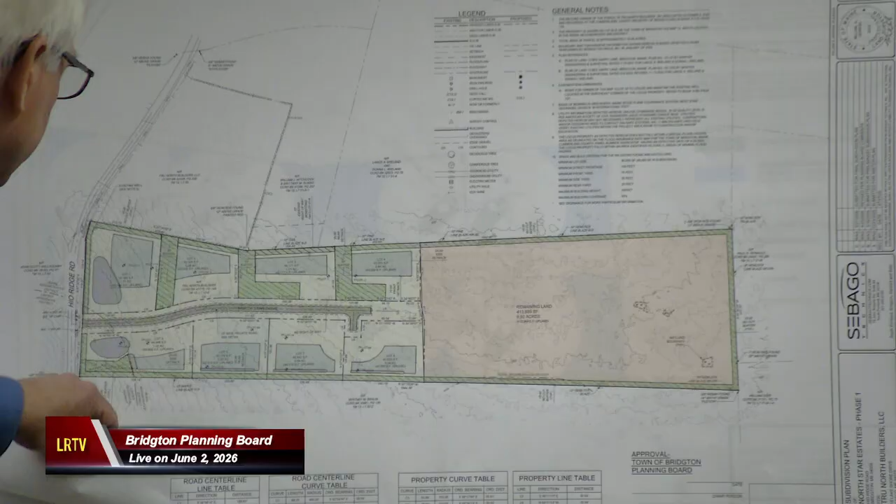And as you may recall, we had some discussion about septic locations, well locations, and meeting all the setbacks. Some of the proposed wastewater disposal systems were moved around,

particularly in this lot. We also did another test pit in this lot to make more room for the building envelope. Initially, some of the test pits before the subdivision was designed were done too close to the boundary, and

one was in the pond. So those test pits have all been redone or added. That additional information was in the package.

The hydrogeologic study has been updated to reflect all of that information. It's kind of hard to see on this, but there's some dots here that represent the proposed well locations.

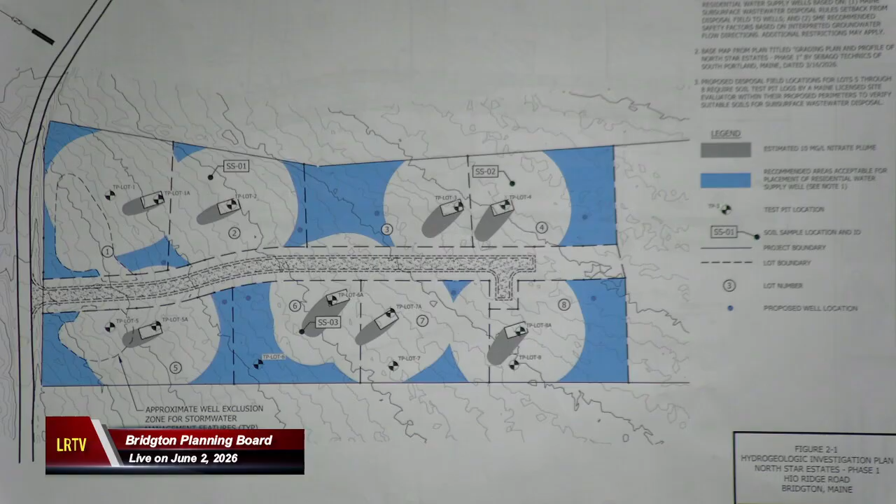And we feel that we've addressed all the groundwater and wastewater disposal comments and questions by providing this additional information.

We also had some discussions about soils mapping, and we have requested a waiver from the requirement to do a high-intensity soil survey, given all the test pits, the grain size analyses, the hydrogeologic study, and the fact that there's

no very poor draining soils on the site. There's no large bedrock outcroppings or other limitations, and we just didn't feel that a high-intensity soil survey would provide us any beneficial information that we don't already have.

There was a question with regards to the county soils maps. We had used a

NRCS, U.S. Department of Agriculture, Natural Resource Conservation Service, NRCS soils map as part of our stormwater study.

The engineer that conducted this analysis used a map that was prepared by the same agency. They're both near the county line, so there's some overlap.

Our map identified the soils based on the Oxford County nomenclature, whereas the other study based it on the Cumberland County nomenclature.

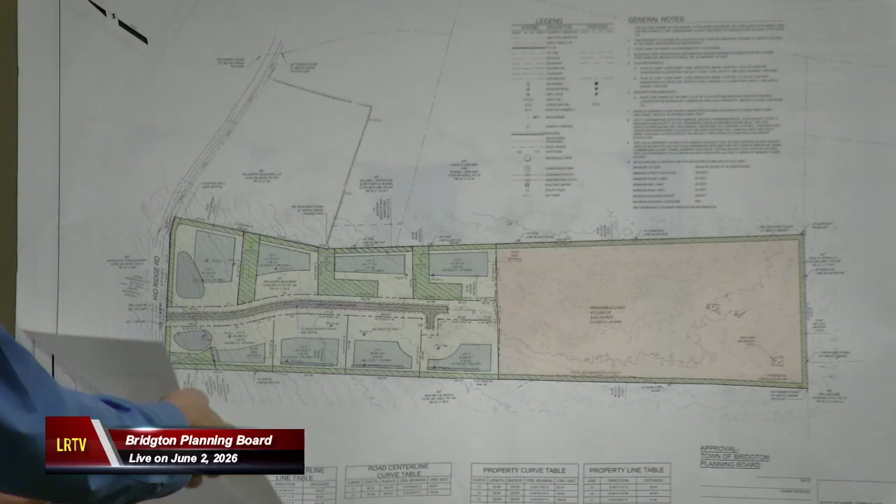It was pointed out that this was originally a 38-acre lot that was split in half into two 19-acre lots. The lot was all logged at one time. There are a number of old logging roads, tote roads that go back and forth over the boundary line. We went down that line all the way along the property with a survey crew and located those openings. They are shown in here, all the gaps that we found. Otherwise, we found pretty good vegetation.

We did provide some pictures in the package of those areas, the typical buffer areas as well as the openings. Given the age of the regrowth on that parcel, there's a lot of good material—small pine trees and small hemlock trees throughout the site that will be within the cleared limits for the proposed houses. So the applicant proposes to remove some of those trees and transplant them along that boundary line as shown on this plan.

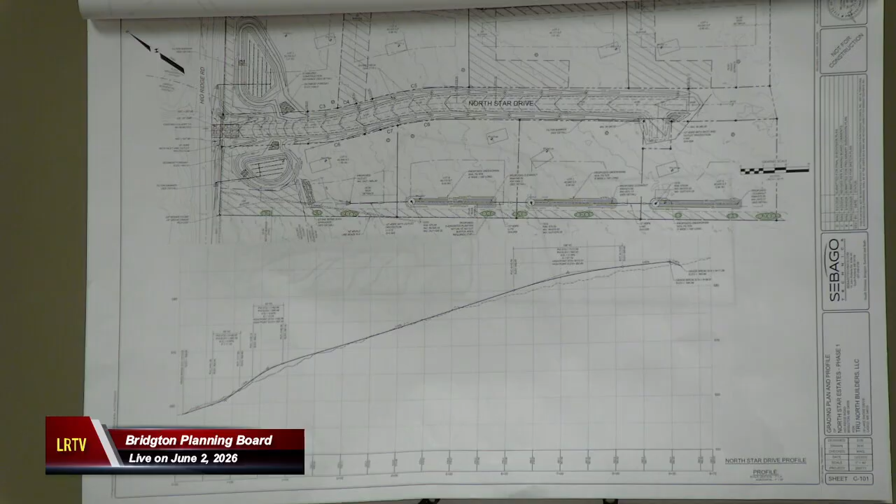And that should provide some good screening in those open areas. The only other significant thing we discussed, or didn't have for this submission but have now, is the homeowner association documents. The ordinance does require some sort of document that outlines the maintenance responsibilities of the subdivision's infrastructure. We received those documents yesterday in draft format. We did submit those to the staff, and they do clearly outline the maintenance responsibilities for the homeowner association. The applicants will assume those responsibilities until the lots are sold, and then the HOA will take over.

The only outstanding issue we have to resolve with the title attorney is that in the documents it references easements to go ahead and maintain the stormwater infrastructure. So what we will be doing is, just like shown on this plan, showing the stormwater features on the recorded subdivision plan. So when the HOA documents and all the deeds are recorded and this plan's recorded, there'll be that connection between all of those documents, and it'll be all part of the public record.

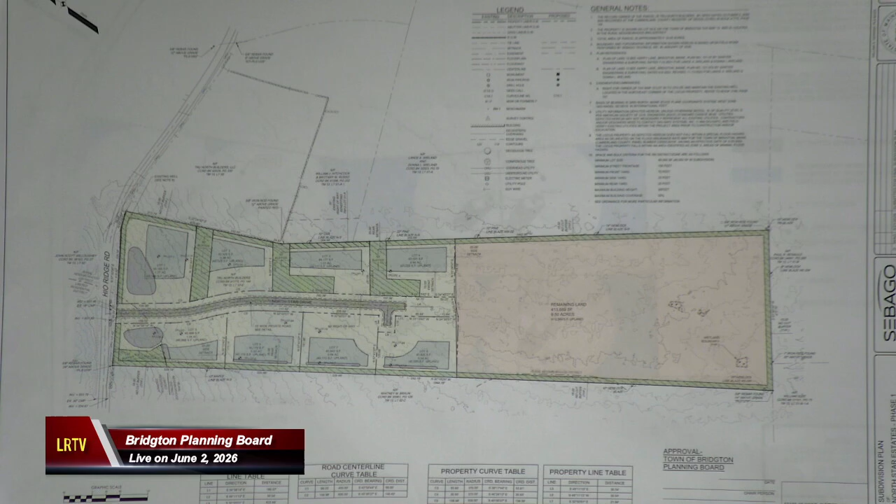Okay, so with those conditions and waivers mentioned, I would accept a motion to tentatively approve the application pending the findings of fact and conclusions of law. Moved by Erica, Ms. Rowland, seconded by Ms. DiPietro. All in favor, please raise your hand. 4-0, thank you.

Again, well done. It's nice when somebody makes our job easier. Okay.

All righty, next on the agenda is the findings of fact and conclusions of law for the Bridgton Highlands Country Club, for the driving range and putting greens and such.

At the last meeting, we asked for a detailed landscaping plan with the species listed. That was submitted, a little on the late side, but we can look at it now if you haven't seen it. It's pretty detailed, it's 3 pages.

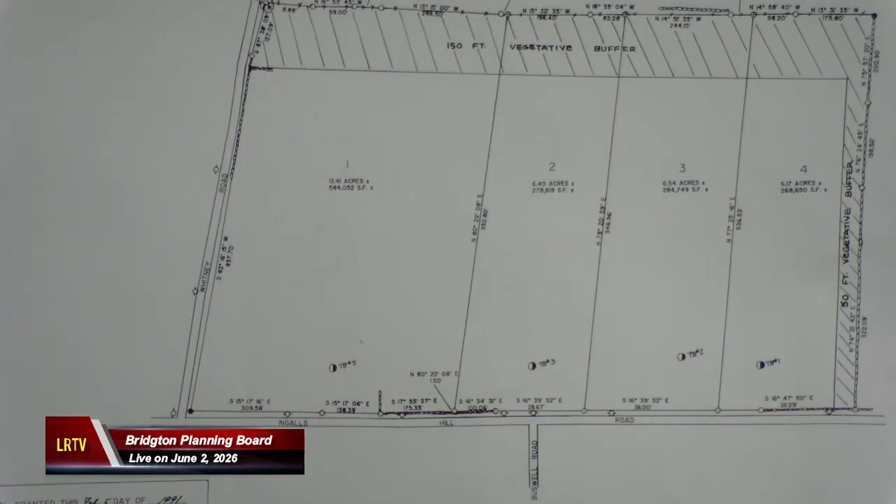So this is turned slightly, almost 90 degrees clockwise from the last plan, but that biggest lot, Lot 1, is 13.47 acres, and last year the proposal was to split off 6 acres on the east side, which was approved last summer. No additional buffers were added. The hatched area in the back was the existing buffer from the original subdivision plan, which would serve to treat the runoff from the new 6-acre lot.

And then the existing lot, we determined that was the 7.37 acres that was remaining, actually drained to the south and was treated by another buffer.

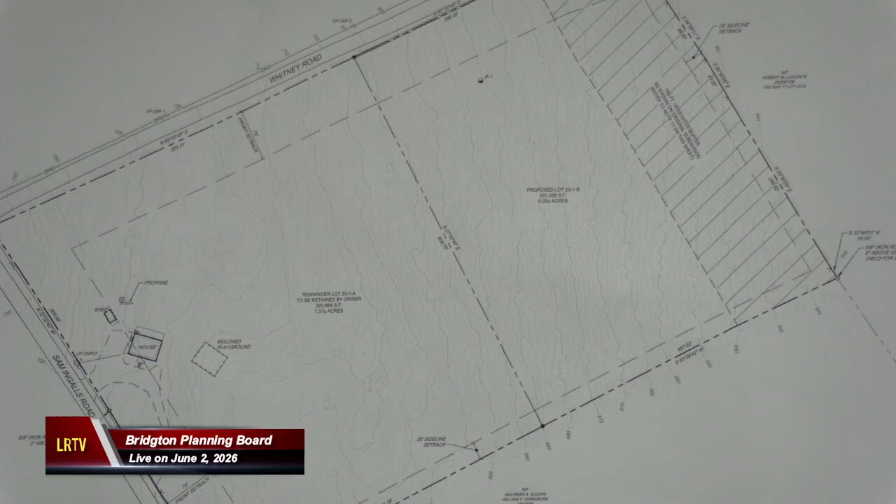So that was approved basically in that configuration as you see it there. Moving fast forward to today, just dealing with this lot here, at a slightly different scale. The proposal is to divide the remaining 7.37 acres into 2 lots. One would be about just under 4 acres, 3.96 acres, that would be the yellow and green area. And then the existing house would remain on a lot that is 3.41 acres.

The new lot would have around 335 feet of frontage on Whitney Road. The remaining lot has a house and driveway on Sam Ingalls Road.

The new lot, it's hard to see the contours on that, but basically the flow downhill is going in this direction, and we did propose a 100-foot buffer along the easterly boundary of that lot, which was sized in accordance with the DEP standards for a single-family residence based on the soils and the slopes there.

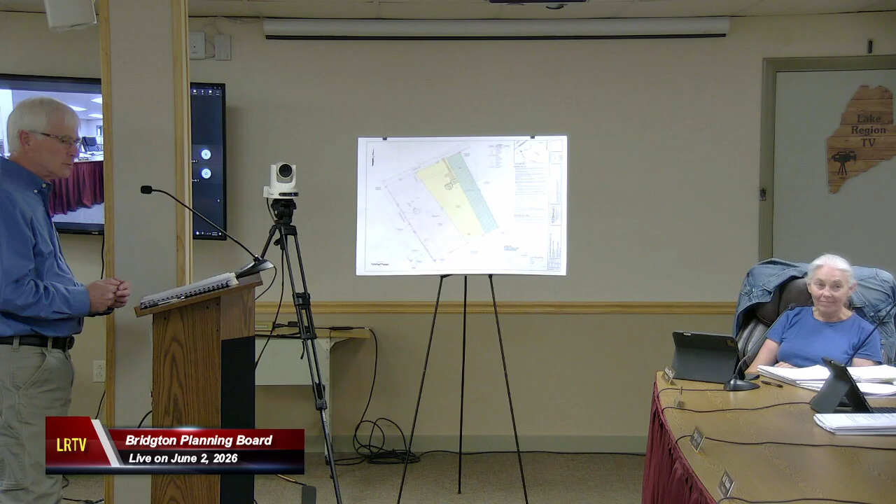Yeah, what I was gonna propose, because this lot has been split now twice, creating 3 lots where there was one, is... maybe there's already, so there's essentially already an existing 15-foot perimeter buffer, looking at this.

And I think that should be maintained. Okay, I don't know how old this subdivision is and whether that was specified, but as things get split, usually the new lots have to meet the current subdivision regulations.

So the existing lot that already has the house wouldn't necessarily need it, but I think those two that are essentially now being created - is there any reason those shouldn't have a 15-foot perimeter buffer? You're looking at me strangely, but I'm pretty sure this is correct. Based on what I see, I don't think that really impacts anything, so I'm trying to follow you. Not looking at you strangely.

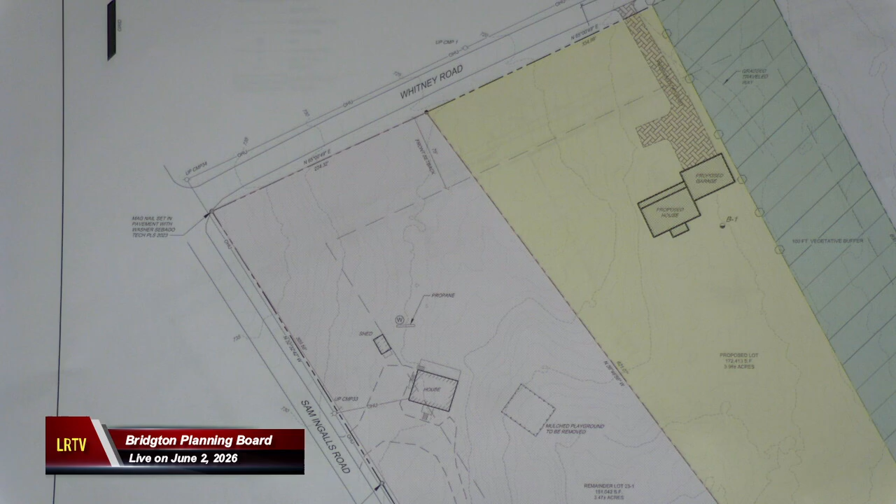There will not be any roads, only driveways. Will the driveways be paved or gravel, or yet to be decided because there's not a home being built yet? I think yet to be decided. I'm anticipating gravel, but I don't know for sure.

And buffers, so a buffer strip of at least 15 feet is required. I would say add that to the final map, okay, then we don't have to condition it.

It's not in the shoreline zone. In terms of the district, which is rural neighborhood, dwelling units are allowed. Meets the comprehensive plan.

When the structures are built, they'll have to be a certain height. The setback, as you can see there, is 75 feet. You're right next to the buffer, but well away from the sideline, so setbacks are met. And the space and bulk standards don't apply.

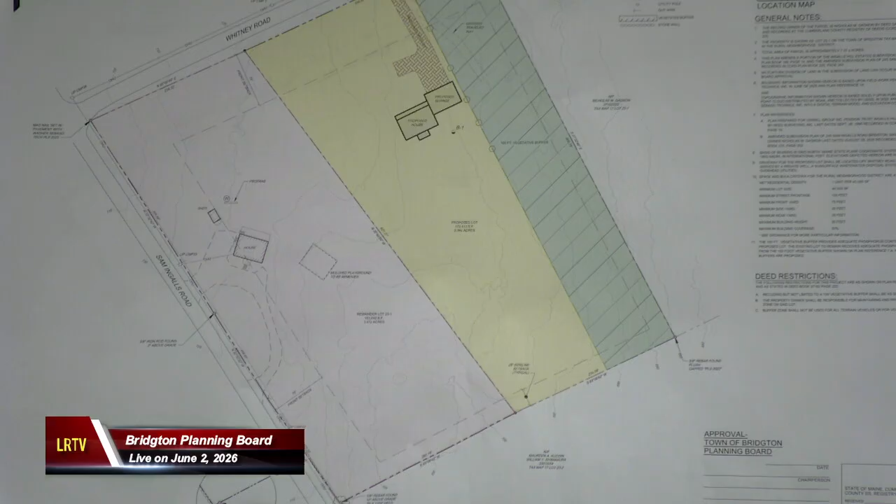Any other observations, questions, concerns? Then I would accept a motion to approve this subdivision lot split as presented, with no conditions, but pending review by the code enforcement officer that it's legal to split the lot, since it's been less than 5 years since the last split.

Moved by Ms. DiPietro, is there a second? Second by Ms. Warner. Any comments? All in favor, please raise your hand. 4-0. Tentative approval, right? What? Tentative approval, right?

Tentative approval, I'm sorry. Thank you for the correction. Tentative approval, pending Brenda's getting us some legal information and the findings of fact and conclusions of law. Okay, I don't think we need to revote, I think just a clarification.

So I think you're all set for tonight. We'll see you in a month. Okay, thank you. All righty.

On to the next item on the agenda, which is South High Street subdivision. Map 9.

It says lot 36 and 36B in the application, but I think this is only 36B, is that correct, Jim? It hasn't been assigned because this was a parcel that was broken out, so it hasn't been assigned yet by the tax assessor as a new lot. But there's not two lots, right? There's just one lot? This was part of a 3-lot subdivision that just happened this spring. So that number hasn't been caught up in the tax assessor's book yet for this new lot that Mr. Lopez is developing. So, okay, because I think it's just 36B. I don't think it's, it may become B1, I don't know. Yeah, okay.

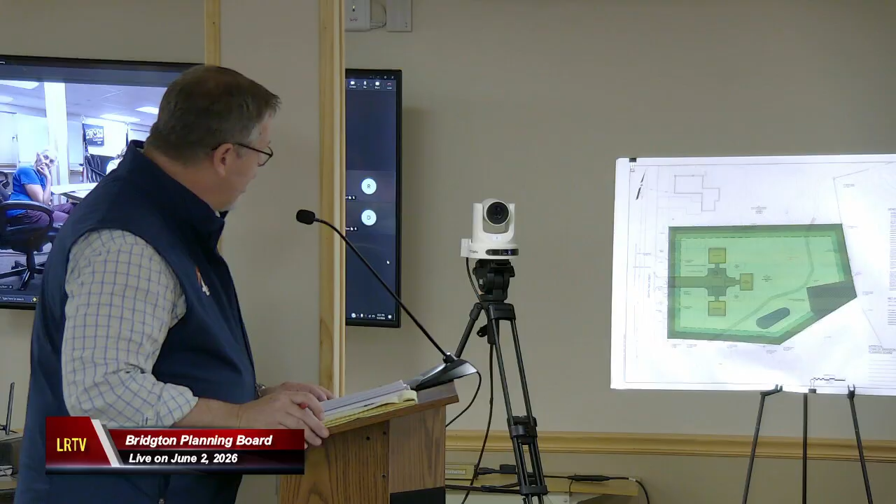That is a treatment area for phosphorus, which I'll get into in a second. This property will have one driveway coming off of South High Street. My understanding is we designed that to meet a road standard. This will probably have to have some kind of road name because of the number of units located off of it, even though it's not 500 feet. Probably for 911 purposes, it'll likely require some kind of name.

We have public water located on South High Street, that will be coming in. We have a curb stop there now at the northwest corner. We'll be tapping into that to supply water for all the buildings. And we have a common septic system located in the middle rear of the lot, kind of just west of that old path that cuts across the lot.

Additionally, since we've provided parking for each of these units, two spaces per unit, we have located snow storage areas, and generally the grading will take water from a west to east direction. We've provided an underdrain soil filter to further help with phosphorus, but also with stormwater peak numbers, down in the eastern sideline of that property line.

This is in the watershed of Long Lake. We have done calculations, and I do think there might have been a clerical error in the cover letter. We're allowed to discharge 0.05 pounds phosphorus per year. With all our attempts to treat, we're still at 0.07, so there is a small compensation fee of, I believe, $137 for phosphorus, which would be payable to the Lake Environmental Association.

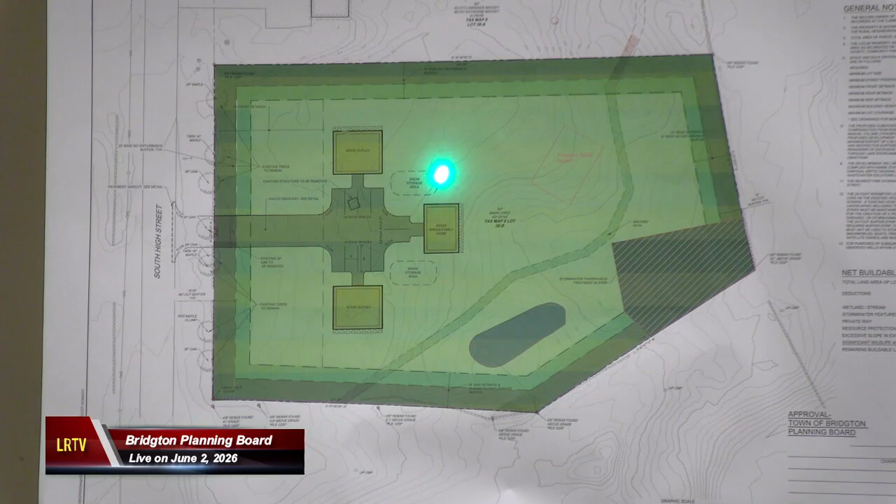The size of the homes: each of the duplexes will be 30 by 34, and the single family, which is the one located straight back, right there is the single, that's a duplex, and that's a duplex. That will be a 24 by 34.

In addition, we're requesting a waiver of landscaping. There are several large trees here in the front. We do have to lose one, but regardless of where we put the driveway, we're most likely going to have to lose one, so we've centered that. Our goal is to preserve all the other existing large trees to keep a nice streetscape going down through South High Street. And the other waiver would be the hydrogeological.

The septic system is located well into the center of the lot. It's creating 990 gallons per day, and we don't feel that will have an adverse impact on any neighbors. And everybody is on public water. So with that, I will gladly take any questions.

Just a clarification, I think one thing that would be helpful in the future, Jim, is when you do the narrative about lot size, I notice you do it on the plan, but in the narrative it just says it meets the 40,000 square foot lot size. Since that's specified per dwelling unit, it would be really helpful to just put that out there, right up front in the narrative, so we know where you're going, what lot size or what your calculation is in density.

So clearly it's a 1 acre lot. And I think the other thing you could just come out and put out there, whether we agree or not, is that you called it a community septic, which is fine, but clearly from looking at the design and what's on the map, you're proposing 5,000 square feet per dwelling unit with the assumption that that's a central septic system.

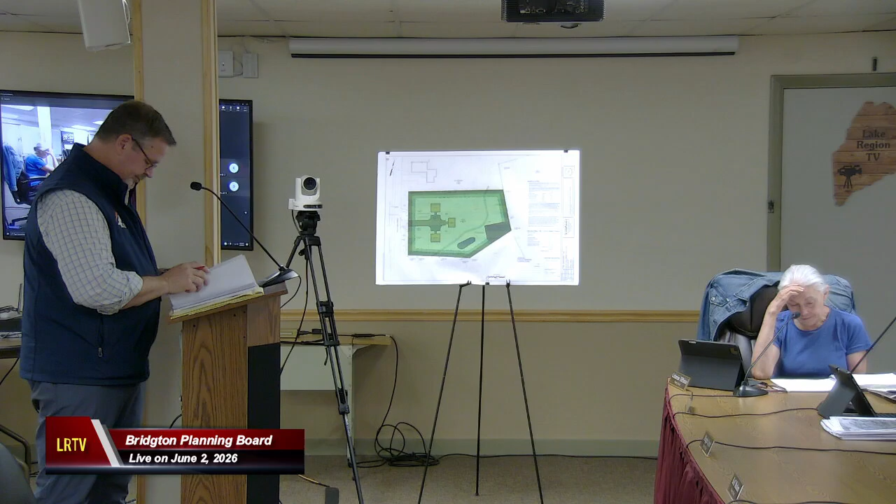Yeah, I'm just trying to... maybe it was in the narrative. Road and homeowners association, I think it was under J, under the subdivision. Well, you're going to condoize this, it looks like, right? At some point - that's what you've mentioned in here. Yeah, so there will obviously be condominium documents at some point created for this.

Yeah, so I'm looking at the review criteria for condominium developments in your narrative. So, yeah, you would have to add something about the septic. Right.

And just make sure that it goes through the proper process, because regardless of state, there'll have to be a determination of who's responsible for pumping tanks and inspecting the system, so on and so forth. I'd expect individual homeowners would be responsible for pumping their tanks, but maybe it's part of a condo association fee. I don't know. That would be up to Mr. Lopez.

So with that in mind, it would be a special system that flows to one field, or one distribution field, which is essentially treating the septic. Are we okay with that?

I'd be okay with it as long as Department of Health Engineering reviews and approves this. Is that the same as DHS, or is that a portion of it? Well, it's a division within DHS that looks at sanitary issues. DHHS, right? Is it under DEP? No, I thought it was under DHHS, because it's Department of Health and Human Services. So in other words, it should follow the basic requirements in law, or rules, for that.

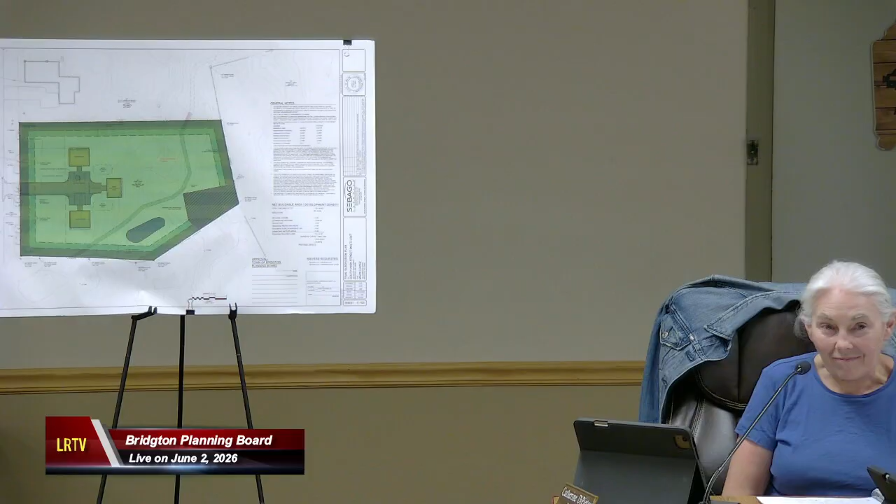So explain that a little bit. What I mean is that if Mr. Lopez truly wanted to assume 5,000 square feet per dwelling unit, if he wanted more dwelling units than what's shown, there's a standard for how much septic you can load per square feet of area.

I think that's just addressed in the findings. And any addition to those — for instance, if the applicant wanted more dwelling units, they'd have to come back to the board anyway. So I think that resolves that. And based on the orientation and layout that Mr. Lopez has proposed, it would be difficult to squeeze another unit in there, just because of the way the parking and the building's layout are — there wouldn't be very good access through those to get to anything in the back or rear.

Jessica and Erica, any thoughts on the septic? So the two on the side are the duplexes, and the one in the back is the single family.

Correct. Yeah, I agree with Kathy — if we get an official approval that this can work as a communal septic, I'd be okay with approving it. And again, assuming it's an HOA and it is communal, because they're in an HOA. Erica, I agree — I like the direction that Kathy went with this.

All right, Kathy, other questions? I thought we should get the big issue out of the way first. Right, I just had one minor thing about the stormwater.

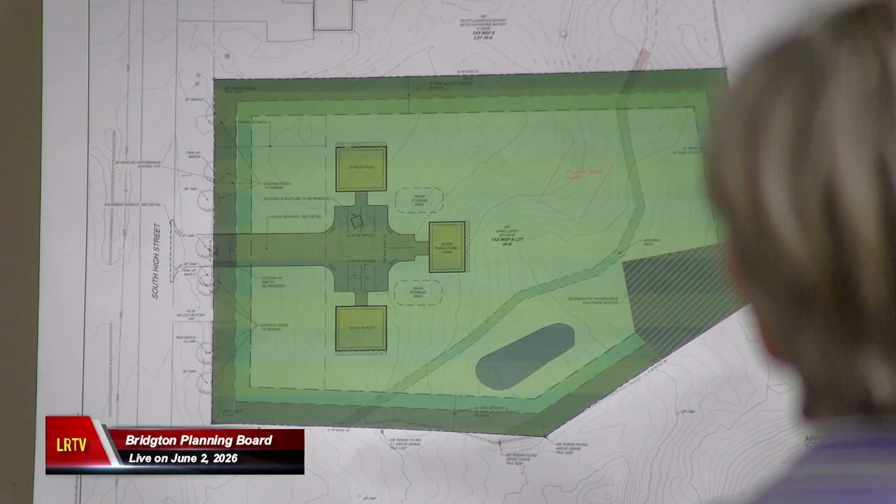So one of the things that came up at the concept review was the thought of not needing another road cut and coming in on this courtyard. Obviously there's already cutting the trees and coming in this way, just flipping that around. Was there any consideration of that? We did consider that, but the right-of-way, the way our surveyors identified it, does not actually touch that property line. There's like what we used to call a spite strip between the two, so they don't have necessary frontage on that road because of a gap between the right-of-way edge and that road.

I like the design that there's one cut through those trees. I think it'd be nice to have those mature trees, kind of a savanna-like feel to it with the large trees.

And then the stone wall, it looked like on the map it would remain except where you have to go through for the driveway. Correct, yep. The wall goes around the front end, at least one side, maybe three of the sides. It goes that side, stops here, and that's kind of where our water would be coming through on that end. This side along the back a little bit too, and this side there's no intentions to do anything. So okay, the stone wall would remain.

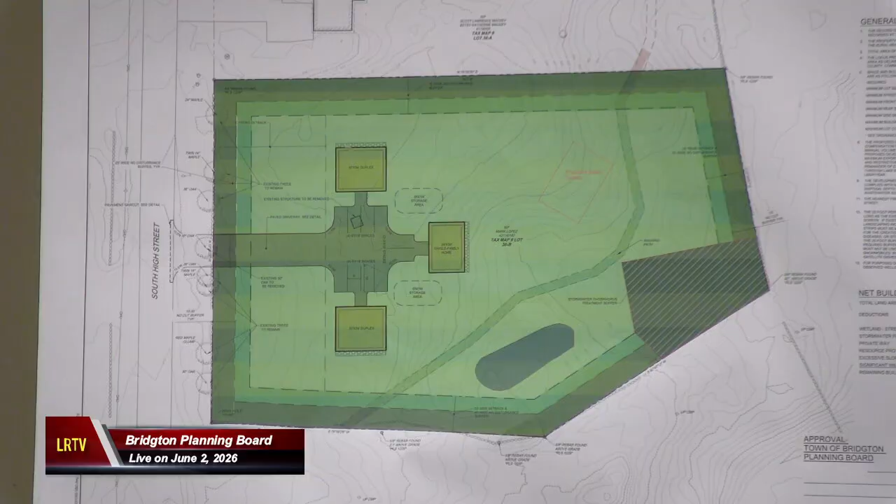The other thing is this needs a 25-foot perimeter buffer. I noticed on the map you had it marked as a 25-foot perimeter buffer everywhere except one, where you had 15. Well, because we got the subdivision standard and the condominium standard. Yeah, it should be 25 all the way around. That's easy enough to fix for the final. Again, we have nothing planned there, so it goes with the stricter one in that case, and honestly we may change subdivision to make it 25 for everything. We tried to mimic what we did for the other one on South High Street, as far as how we show it.

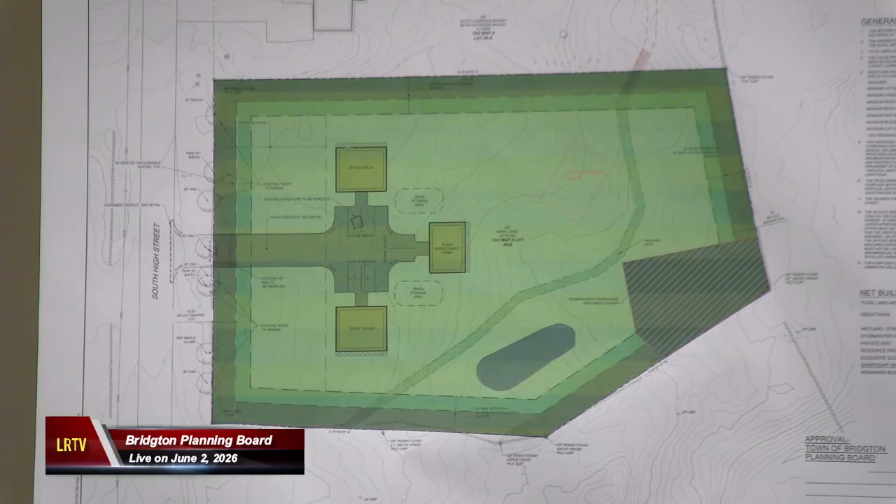Sidewalks aren't required here, you're not proposing any? And sounds like you're gonna need a driveway sign of some sort, will we need an E911 sign or a name for that because of the 5 units? Will we need to name this driveway because it has 5 units off of it? Yes. Yeah, we had expectations that that's most likely would be required.

The other thing is you mentioned that it'll be built to the town specs and pointed to a road detail, but there is no detail provided. So if you could provide a spec sheet on that, it can be the same as the other ones you've seen for that. Okay, I thought we had that on there.

We talked about a legally binding maintenance plan, which includes the septic.

You also mentioned sight distance was on the map, but I couldn't find it. It well exceeds, it's excellent sight distance. I'm sure it does, but we'll note that there. It should just say it has good sight distance, either on the map or in the narrative, that would be fine.

This piece was split off, sold to a Mr. Jordan, who is in the audience this evening, and then the remainder stayed with ML Investments, and now they're splitting this. This lot exceeds the 80,000 square feet under the normal zoning requirement. However, because this is going to subdivision, we will be utilizing the 40,000 square foot minimum lot size. As I mentioned, this is in the RN district.

The remaining area in green consists of 2.31 acres. This will be served by private well and private septic. Runoff from all these properties goes into the Long Lake watershed. We are allowed to generate 0.8 pounds of phosphorus per year. We are only generating 0.03.

We're including a 100-foot buffer here. This is all kind of meadow area, even though there's a large contingency of maples that are going to take over very soon. So that is well below the requirement for compensation.

This is on Highway 93, Sweden Road, state jurisdiction. We have applied for a highway entrance permit for both driveways to serve the lots. We're waiting for that approval.

There is a small easement that we've also included, again, to kind of limit the amount of disturbance we need to do in the front. So we included a small area here in the front to allow overhead extension feed into those lots from one pole. There's a pole here that will serve this lot, and then we'll come over here. So it cuts across the private lot for the private service.

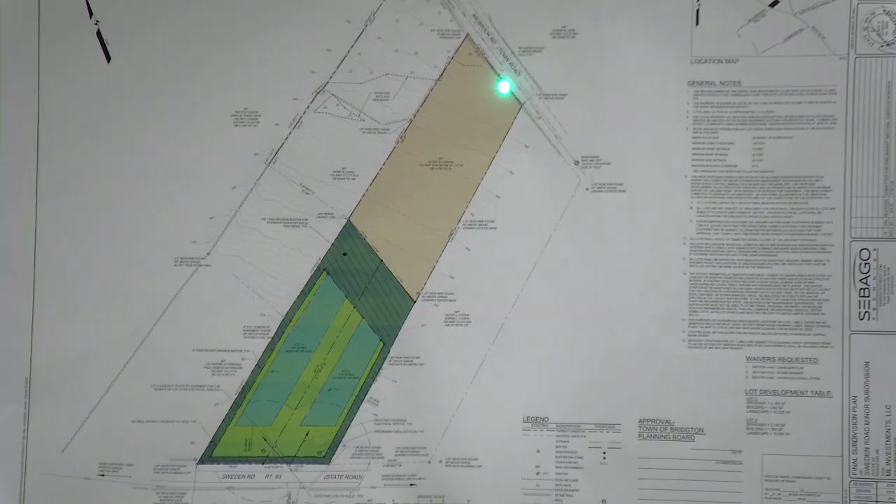We are asking for a waiver of landscape, stormwater drainage, and hydrogeology. Again, this will be served by septic systems. The gradient of land goes from Sweden Road to Millbrook Road, and it's a pretty moderate, soft slope going down through. They're pretty consistent all the way down through.

The one thing I would like the board to understand, and I know we'll probably hear some feedback tonight from some of the neighbors, is this Sweden Road keeps going uphill, and there's a large hill on the opposite side of Sweden Road, a large watershed that feeds this area. There is a large culvert that cuts across here, and that runoff runs down this common property line, and then it just kind of starts fading out and distributing, and the properties down here often get inundated from this water source from the state. I did walk this with Mr. Jordan this afternoon to take a look at the impacts.

What happens is, as I said, that water comes off there. There's a lot of groundwater coming off the hillside as well as runoff coming down the state highway. It discharges. There is a common swale that cuts between the properties to the south and this property, but then that swale starts to kind of dissipate as it gets further down into the meadow area.

That water spreads out and cascades, and I can imagine that during a large rain event, there's quite a bit of water that comes all the way down to Millbrook. I think when we looked at this the first time, we understood that there was quite a rush of off-site water that cuts through this property.

What we are proposing, based on what Mr. Jordan discussed with me, is that we will not be contributing towards this channel with any of the runoff from this property. Most of the homes are going to be built up here. If you look where the test pits are, our line of disturbance probably won't go much beyond those septic systems. Our goal is to build closer to the road, for infrastructure costs, and then that water would follow the natural progressions, following the contours.

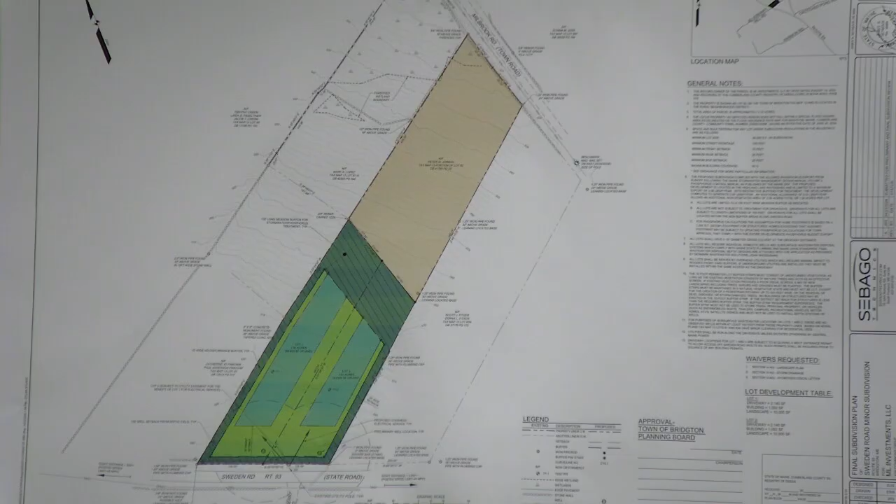I know they were notified the first time, but we had the wrong date, and I believe we utilized the same exact list, so I'm not sure whether that's a postal error or us. I would like to clarify that for the board.

Yeah, so Erica has a question. Why don't we start with her, then we'll get the public in here too. The culvert that you're going to run under the two driveways, is that going to add water to the swale? No, that water, there's already a ditch there. That's what I wondered, there's a ditch. Yeah, that's why we have to put the culvert there, because it would back up the water. So that's just to allow the conveyance of the ditch water through, it's nothing that we're generating.

I have a comment, it was a little unclear to me, but these would be single-family homes. That's what would be supported there. Yes. Okay.

Before the rest of the board goes, would members of the public like to get up and speak? Go ahead, name and address. If we can make it.

Yeah, hi there. I'm Ken Gibbs, address 27 Millbrook Road, and just a few little anomalies. This is a very interesting subdivision that has been created. In other words, you have one lot, it was divided into two, the bottom lot was sold, and then subsequently, the top lot on 93 was divided into two. And so it could be considered as being a three-lot subdivision. And in fact, MMA, in reading it, seems to think that that is quite possible.

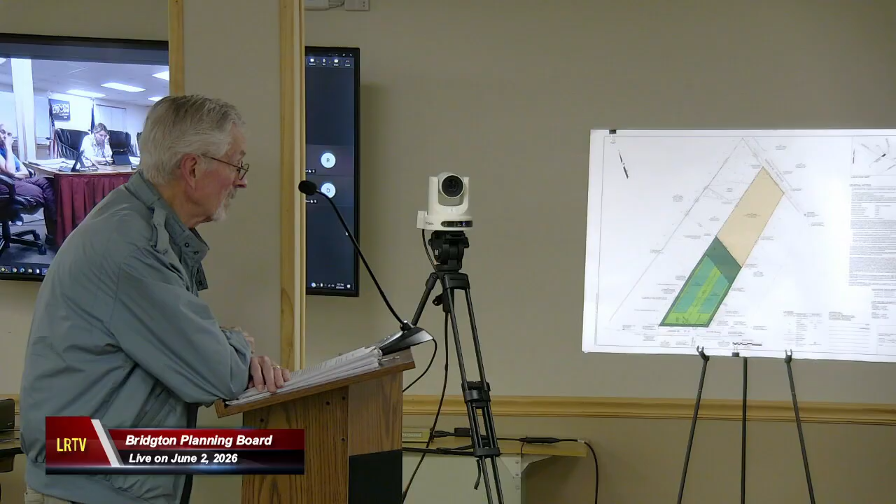It is considerable runoff, and we've discussed it before when a subdivision was proposed on this land. That's another waiver they're asking for, storm drainage evaluation, and I would think it best not to waive the landscaping because you want something between that lot and the lot owned by the Fitzgers, and you'd want to know whether that meadow buffer is sufficient to take the runoff. Believe me, there is an enormous amount of runoff on this property, and it's something that needs serious consideration, especially for the protection of the lot now owned by Mr. Jordan.

Actually, it's a very gentle slope there, but it goes on for miles, and that gathers an enormous amount of water coming down at this particular point. The town has put a significant drainage area along 93, but it is in some respects insufficient when overloaded by rain. So in conclusion, I'd say it's a very interesting splitting possibility for making a subdivision, but I would question the request for waivers of landscaping and of storm drainage inspection, and an engineer looking at whether everything is going to work in such a way that it doesn't endanger the property owned by Mr. Jordan.

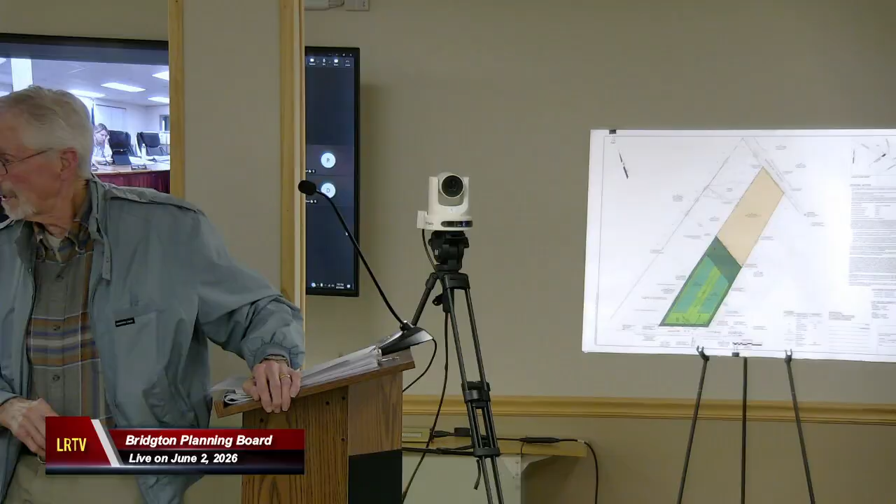Yeah, I don't think they're asking for a waiver of the stormwater. It's on their original. Maybe they can, it's the hydrogeological study, which, yeah, the hydrogeological, but you did ask for a waiver of this. Oh sure, yeah, okay, gotta get out of the way here. Sorry. We did ask for a waiver of the stormwater management portion for capacity, because our feeling was these were two minor single-family homes. The problem with the runoff is off-site contributions and not necessarily from the property itself. So we'll let the board deliberate on that when we come back after I hear the rest of the public comments.

Okay, thank you. And thanks, Brenda, for getting the legal opinion, which is wonderful legalese. It's great. It's written for a legal interpretation only. Yeah, you didn't write it. Nope.

Okay, does anybody else have any other public comments? Please come to the mic.

Name and address, please. Peter Jordan, 44 Millbrook. May I just address the map instead of standing here? Sure.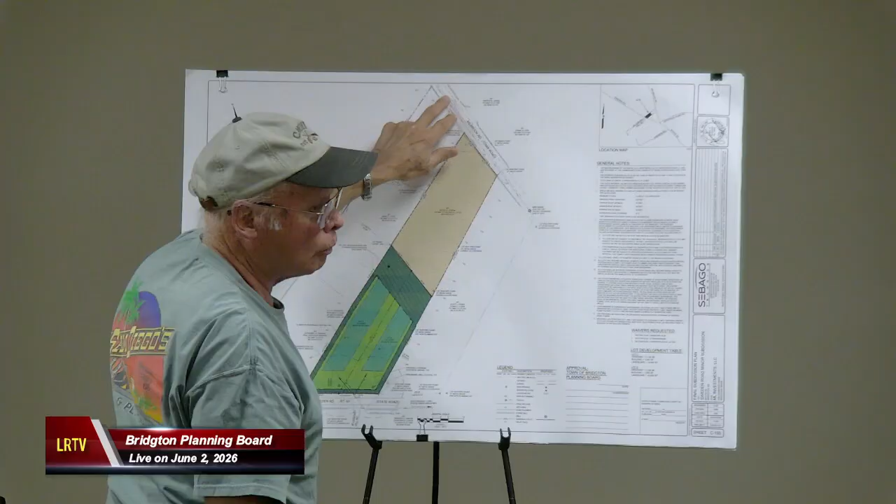I bought this lot last September, looked at it in August, bone dry. Starting in January, water's run over my whole lot, a sheet runoff, the whole lot. It also goes down under this land. There's a stone wall here most of the way. The water works its way across my lot, follows the stone wall, and then goes onto this lot, and eventually you've got a waterfall going into the ditch down here.

If it had been disclosed to me that this lot was going to be wet 8 months out of the year, I would not have bought it.

Since I built my house, starting in January, the water has just been coming continuously. So I had to dig a ditch from this pin right here, over here, to get the water to eventually work its way down the stone wall like it always has over the whole lot, so that I can have a dry piece of land to live on. What I did was I dug a 2-foot wide ditch that's 18 inches deep, and it runs continuously. Not quite enough to stock it with trout, but it runs continuously. So that's what I've had to do.

My concern is that 5 years down the road, whoever's here decides, well, I don't want this water running across here, which it does. I don't want that anymore, so I'm gonna dig a ditch right down here with a backhoe and just dump it. Then it will be uncontrollable, because it already goes out here onto this guy's land, and it also comes here. My ditch has to end at the boundary.

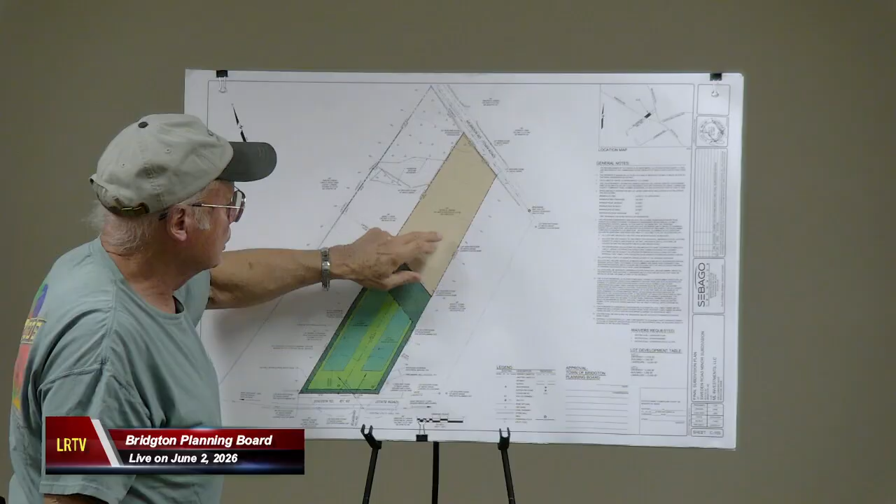It just may be too much if we get one of these 100-year storms we seem to get every year or so now. So my concern is that I would like to see the planning board put some kind of restriction here, even though I know there's a 15-foot thing where you're not supposed to do anything, although we all know what people do after a few years. I would like something specific so that whoever owns this lot, me or somebody else, has some recourse at some point from having too much water dumped on them.

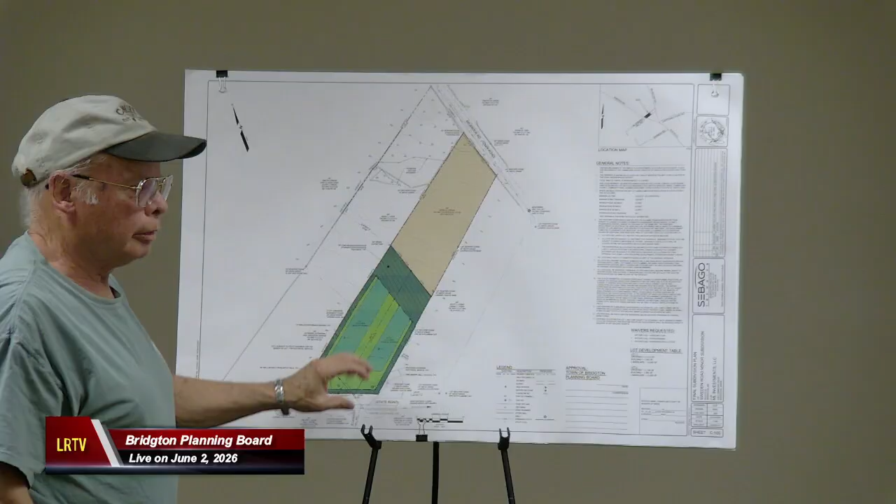Okay, I think that's very doable. Okay.

I guess I missed the stormwater thing. Do we have a phosphorus calculation on this? Yes, yes. Kathy, do you want to comment?

I would, and if anybody wants to see the pictures of the ditch, I have them. I've been down that road, I've seen it. I don't think you've seen the ditch I dug, it's on my lot. I haven't been on the lot, but I've looked at it. I believe everything you're telling us.

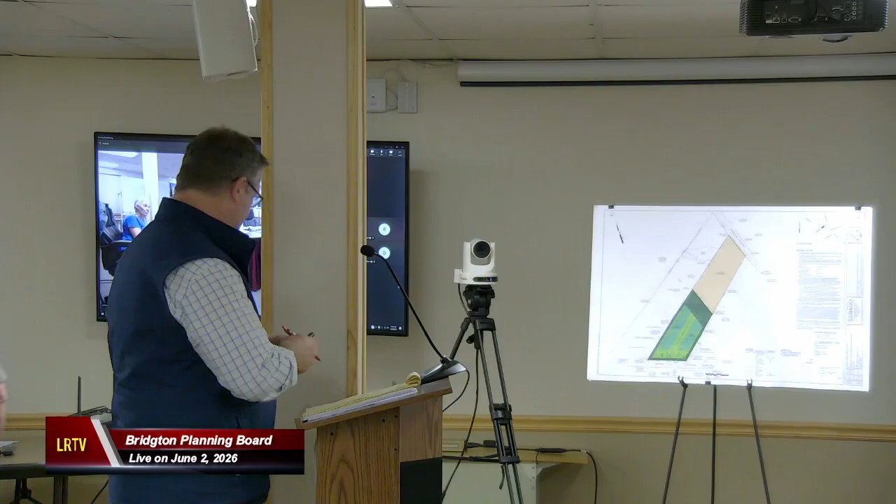May I respond? Thank you. With regards to the buffer, you are correct in that, about 75 feet to where the front setback is, and maybe another 25 feet, maybe 100 feet of that common sideline with the folks to the south has vegetation growing on it. From there, you're correct, it opens up, and it's a meadow. It's probably was a meadow for many years. On this side, probably to about here, there's trees growing along the edge of that swale that cuts down through there.

That swale kind of meanders in and out of the property lines, but once you get beyond that, they've mowed right up to the edge of that swale, so there's no trees on this side. There's some low scrubby stuff that's coming in. I would say that this field is starting to be taken over by an incredible amount of maples. They're only knee-high, but in a few years, they're going to be 6 feet high. There's going to be an amazing takeoff of maples that have just filled in the meadow area there.

But to that point, we're not opposed, because of the grade drop, it's going to take some time for that buffer to have any meaning to the people down below. Maybe we're not opposed to planting some pines or something along the edge of that buffer. I really don't want to go into that buffer to disturb it, but we could plant something along the edge. Or maybe it's even more desirable to do something here on this sideline outside the 15 feet required. I would probably do that, because the swale, that 15 feet actually comprises a good part of that swale as well.

It would make sense, from a stability standpoint, to plant trees along the edge of that swale just to keep it intact. We can also berm that up a little bit so the water can't get out of the swale—make a small earth berm, a foot high or so, to block the water from getting out. You can plant along the top of that berm to create a diversion.

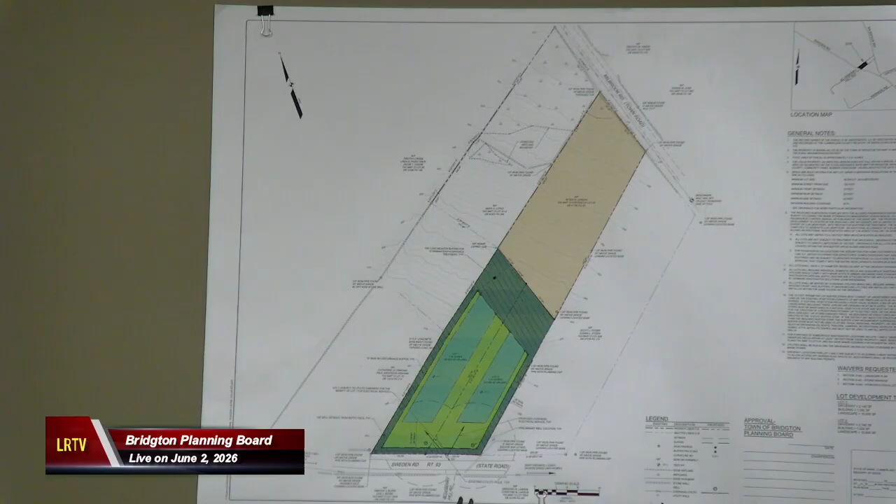So, back to the board. I think I like the explanation you're giving about the water, its source, and where it's going. Give your best engineering narrative on that, with some detail. Okay.

Does this mean we would need a landscaping plan? Yes, I was going to get to that. I'm just going to ask Kathy her feelings on the stormwater.

My question is, since you've walked the site, where on the site does the water begin to spread out?

What happens is, I think over time this has been a very gentle swale. Obviously it scours here because it's got some energy behind it. Once it gets down to about where our property is, near where we show the buffer, the channel itself starts to fill in, and the water starts moving out in a fan-like pattern, then starts migrating down like this.

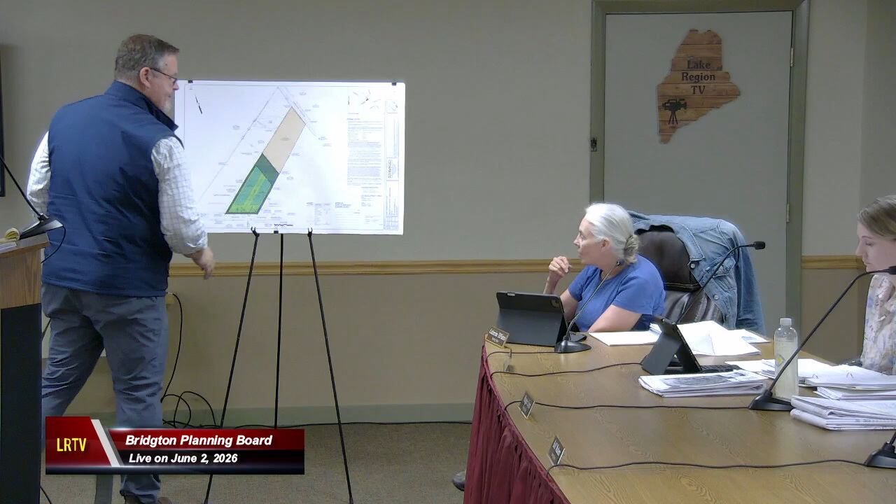Right, but we sort of need to know what the impacts of that are on the buffer you're trying to create.

Again, that water kind of goes down, and where we were walking today, Mr. Jordan said on his pin, really, once we get beyond his property pin, that water starts to spread out and turns. So it really is at the end of this buffer. Ideally, in a perfect world, we had discussed in an engineering decision, would have been to riprap that channel down to Millbrook to let that water go, but that ship sailed unfortunately a long time ago. That would have to be a collaboration between the town, the DOT and homeowners, because it's their water that's impacting this. So that's the general direction the water runs.

I'm guessing that before a change of hands, that swale may have been maintained a little cleaner to keep that water directed straight down over the hill. But as time goes on, things fill in, and now that water just starts fanning out and follows the contours, which unfortunately takes it right through the middle of Mr. Jordan's lot. So for me to support not having the stormwater management report, I'd want some sort of report that's convincing.

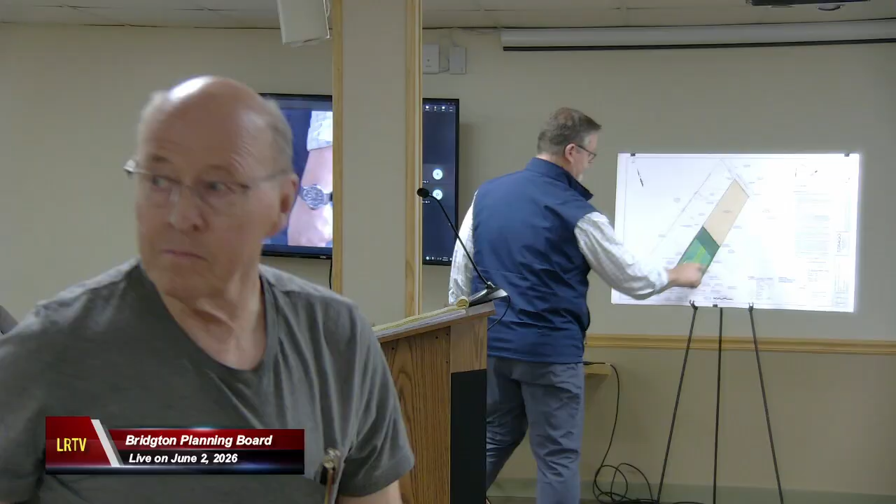I agree, you don't want to go too far back. So it could be, instead of it being at the back, it could be in the front along there. I do feel that low vegetation is going to be the best treatment for phosphorus and for long-term uptake of any stormwater runoff as well. It will mitigate and absorb a lot of that.

But again, a lot of the issues are from off-site contribution. You could leave that there though, right? Yeah, and still put in the landscape. That's what I would do, plant some evergreens or pines across the rear to break it up a little bit. Like I said, walking that field today, there's going to be an eruption of maples in short order, so it'll be a jungle out there in 5 years.

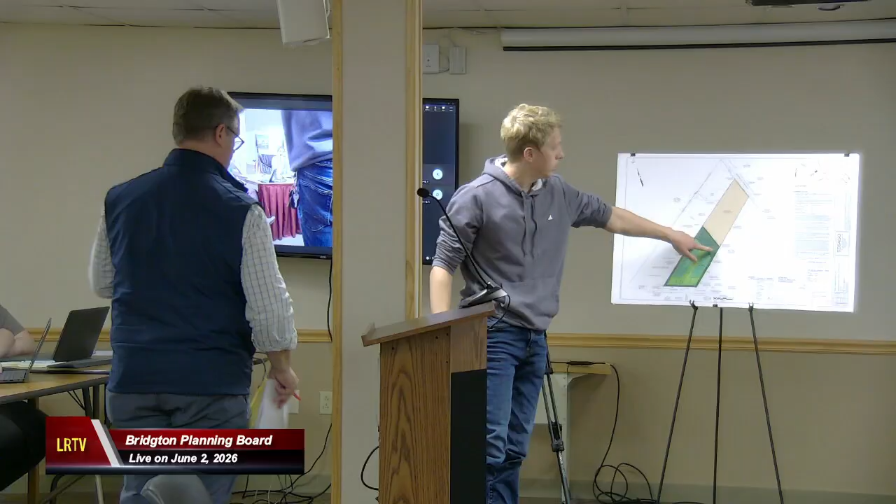Royce? Right, so does the board want a berm here? No. What I was suggesting was we have tree plantings here, and where that vegetation line ends, we build a small, very narrow berm, and use that as a diversion to keep the water from going into that, and also use it as a planting.

And also put some plantings in there so that it's screened from the other home. So there's two purposes there. One is the water, the other is screening. I want to make sure there are trees on both sides of the lot. This side is well vegetated, this side is open.

Okay, then for the two reasons, you don't need it along the whole thing, just where the opening, similar to what we discussed with Ohio Ridge, where the openings are. There's an opening that starts right about here, and goes down the rest of the way, so what you're saying is from here to here, and then across, kind of a reverse L.

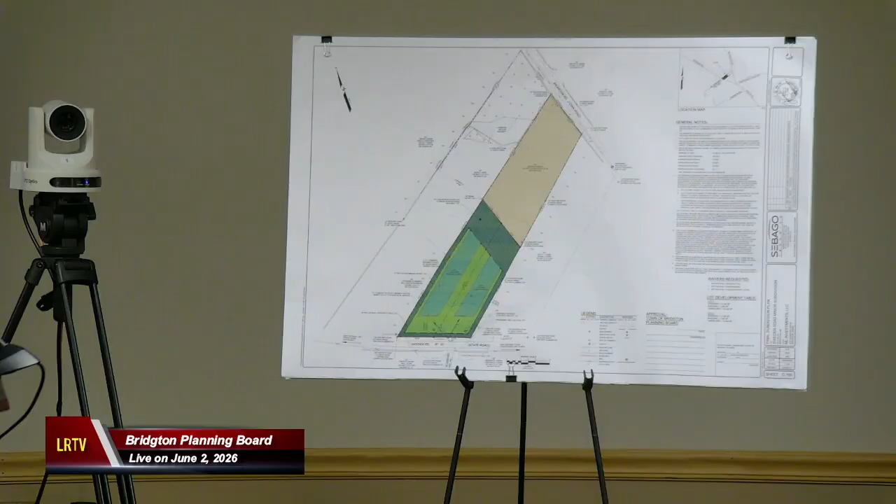So you want us to plant trees in the buffer? No, outside, just outside. Here? Trees there? Yeah, right along that edge, that dark area is the buffer itself. And then in addition to the berm, here, because you have an opening here.

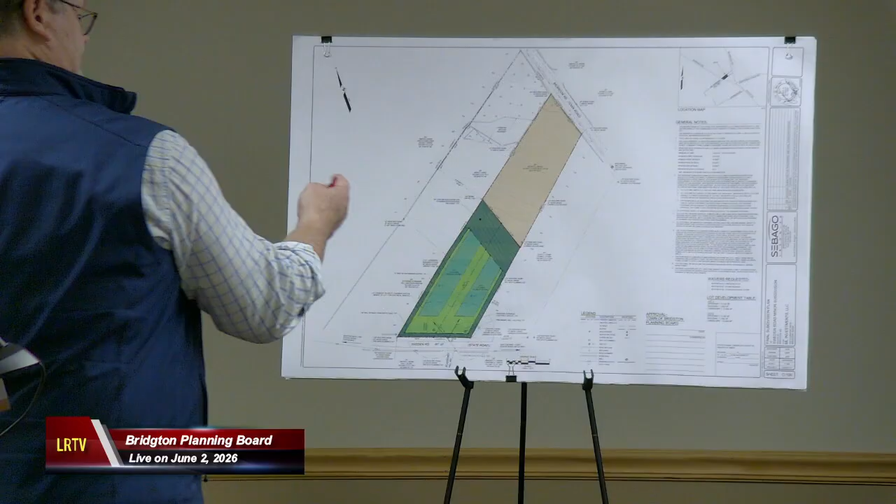Is the buffer for water runoff or for the screening? Both. It's a double purpose, I guess. We can build a berm here, plant on it, nothing really high, just enough to keep the runoff from going in along here, then the back would just be planted for screening and to assist with the water. So for the screening, is that for the house down here, so they don't have to see these houses? No, going the wrong way.

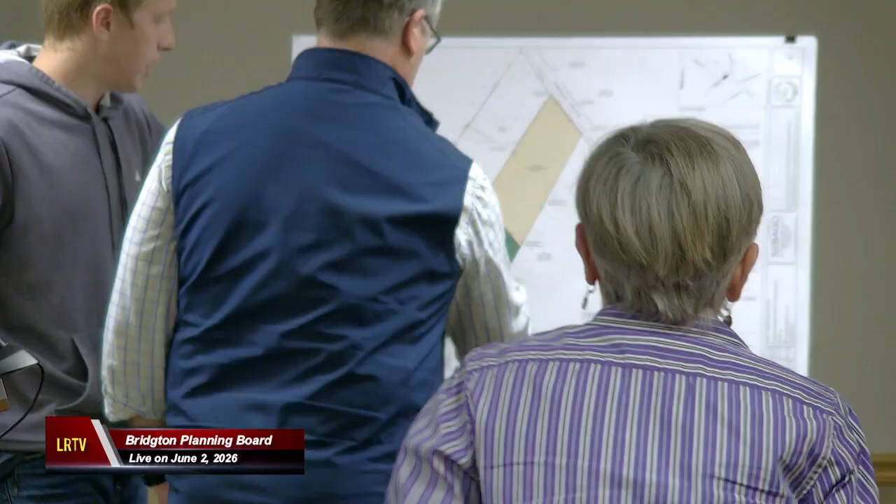No, the house, there's a house right there. There's a house here, yeah. So they don't have to look this way at the house? Does that house face this way? You gotta put the house in the right spot. The yard is right there - from the road, I can see this house.

Is there a gap on the other side as well? There's not much buffer there. There's a house up here. Okay, we've got - right here. Yes, that's what we're talking about. This is running here. The requirement is a 15-foot perimeter buffer facing this way. It doesn't matter what way the house is facing.

So you're just asking us to bolster the 15-foot buffer, basically? Correct. Are we required to have a buffer? Yes, that's a subdivision requirement, a standard that's required. It basically says if a natural buffer doesn't exist, you have to make one - you have to plant one.

We're requesting some trees to be put in. Correct, that's what we're talking about, the buffer, and that's right there. Okay, so we also want trees here for water runoff and screening, because there's not a substantial vegetative buffer. Yeah, that berm is substantial for the runoff, but the back one is more for screening purposes.

Correct. Even though there are maples here that will grow up in a couple of years, will those go on the screen? Correct, so at this point I would say no. I mean, I can see Mr. Jordan's house from the road quite easily.

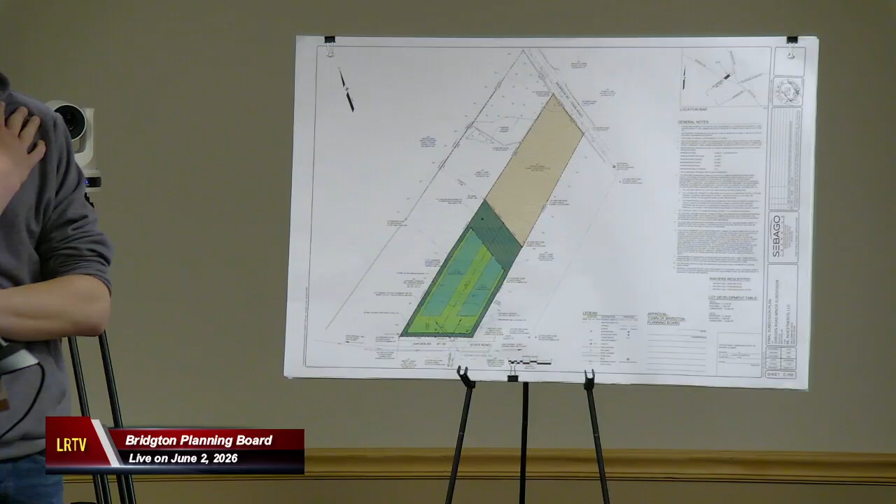I think what we can do is put some pines or something like that, just to break it up. You've got a whole row of pines there that starts it, that are quite large. I would put in some decent-sized pines, like 8 foot high, and they've got to be spaced properly - the spacing is going to decide the number.

Okay, so do we have trees in this? Do we need trees in this on the front? You need trees in the front - if you don't have trees, we have to plant. There are some trees there, there's a buffer there. Yeah, there's a decent scrub shrub buffer you need there.

Make sure that what's there is 15 feet wide. If it's not, when you come back, go back to that area, check it out, make sure it's 15 feet wide, and if it's not, then there should be some plantings. You'd really ideally want to make as minimal a cut as you can, and as minimal a removal of the stone wall as you can.

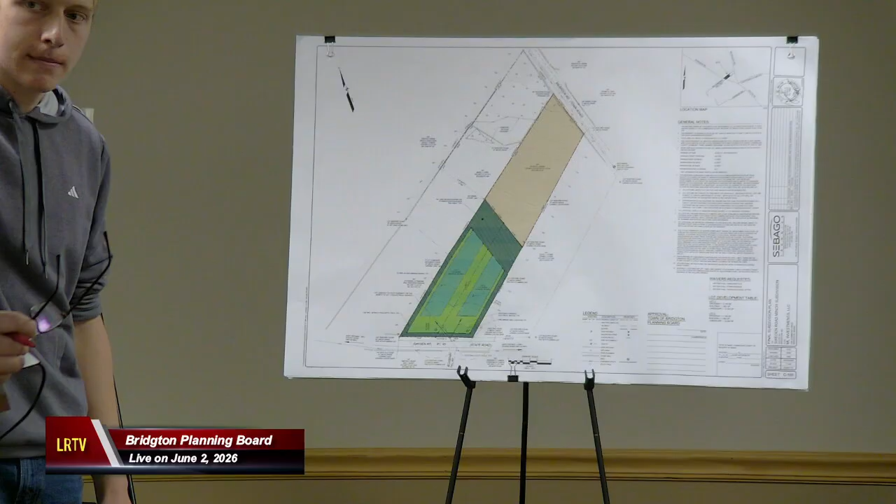Yeah, like 20 feet or whatever. There's need for some stuff coming up behind, as always, there's stuff coming up behind the stone wall. So I think that's the big thing here.

It would be good if we get a waiver so we didn't have to plant all those trees. If we're talking trees here and here, that's gonna add up pretty quickly, if this house isn't staring out their living room windows at us.

It's required, the buffer. I think, could we get a sense from the board about a waiver for it? We could waiver it, but I think the board -- there's a lot of must-use in the buffer law, in the buffer section, and reading the board here and the abutters, I think this is usually one of the most, if not the most important thing to abutters, that buffer screen. So I think the board's pretty squishy about giving a waiver on that.

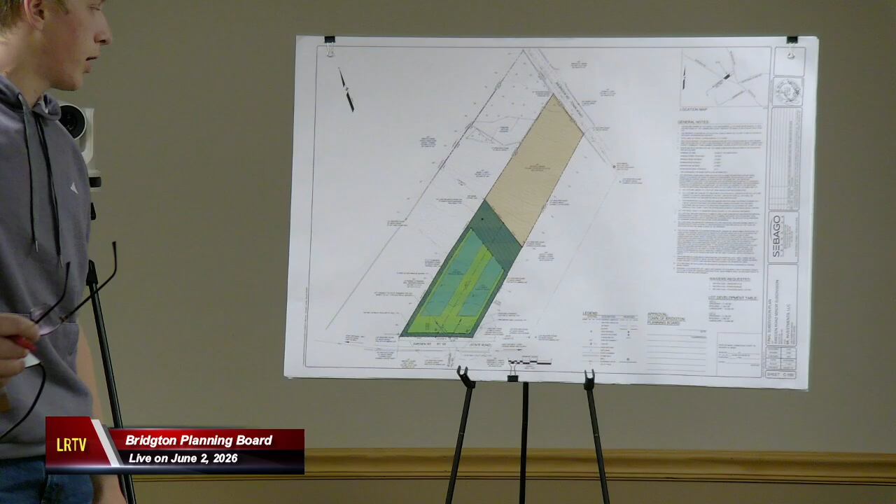Question: is the proposal for single-family homes on these lots? Yes, single-family homes are the only thing that could be allowed because of the amount of land available and the type of septic and water, so it'd be single-family homes. Duplexes or triplexes or anything? That wouldn't be possible, and it won't even be possible after the new law changes.

Oh, this gentleman would like to speak. So, would you like to speak? One or two more comments, we're overtime right now.

Well, I'm a partner of Christine Larson, who owns the property opposite this lot. We were concerned with the large trees that face Route 93 being cut for the driveway. And I understand there's some concern among the builders not to cut too much, because these large trees absorb a lot of water.

We've lived through two different big storms that washed out the driveway that goes up Blueberry Hill. We know the water is coming off Blueberry Hill, but it's also coming, as they pointed out, down the road. It's a fearsome storm that wipes these out, but it's done it twice in the past few years.